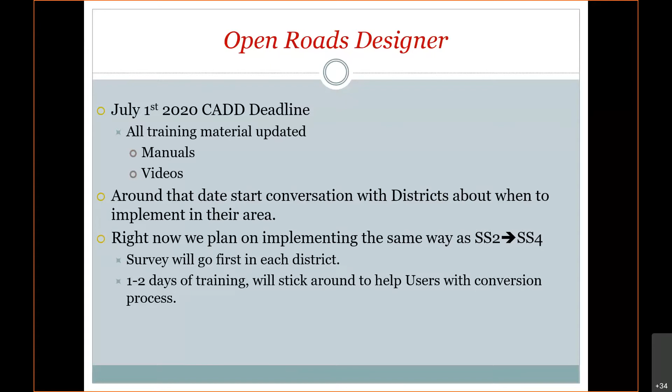So what's different about Open Roads Designer? Well, there's no more GeoPak, InRoads, or MX, the three civil engineering programs that Bentley had. They basically merged all those into one product called Open Roads Designer. It's 64-bit technology, so it takes on a lot more of the computer's memory.

And all the old native tools have been updated. Now, they may not be updated to the point where we'd like them to be updated, but there are no more native tools anymore in OpenRoads Designer. And so things like the plan sheet tool, that was still the old SS2 plan sheet tool, that's been updated. The alignment stationing is brand new. It doesn't use a GPK anymore. So GPKs are non-existent. And a lot of the COGO tools that we're missing, like translation, rotation, scaling tool, that's all in there now in the new ORD.

Something that's kind of similar, our survey and design features are the same. Before in SS4, they were called a feature definition, a survey feature definition, a design feature definition, and they were basically two different animals because they had different attributes to them. Well, in OpenRoads Designer, a feature definition is a feature definition, whether it's survey or design, it's the same type of feature definition. So that'll be a plus.

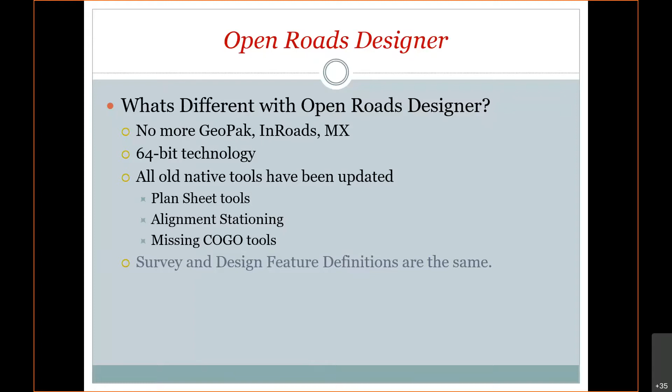There's a new interface. It's more like an Office product where you've got ribbons across the top. And the managed workspace will now be in ProjectWise and not on the T drive. So T drives could theoretically go away after we push out to the districts because we don't need the T drive anymore for the workspace. It'll be in ProjectWise. And that's basically what that said there as well.

So 32 versus 64-bit. So I went out and did a Google search on that, and a 32-bit processor can handle just over 4 gigs in memory, okay? But a 64-bit can handle just over 17 billion gigabytes of memory. So quite a bit more memory can be utilized in the new program. Most of our laptops or our workstations are 64-bit, but the SS4 program can't utilize it because it was written in 32-bit code.

So this memory, when you're working with big files, terrain models, LiDAR files, it should run a lot smoother and handle the bigger files. So here's a picture of what OpenRoads Designer looks like. You can kind of see the ribbons across the top. The nice thing about this is most of the tools are identical to what's in SS4. You just got to figure out where the tool is at, and we've tried to organize it so that you can find those tools fairly easily. And again, we'll explain all that when we come out and train you guys when we decide to go to ORD.

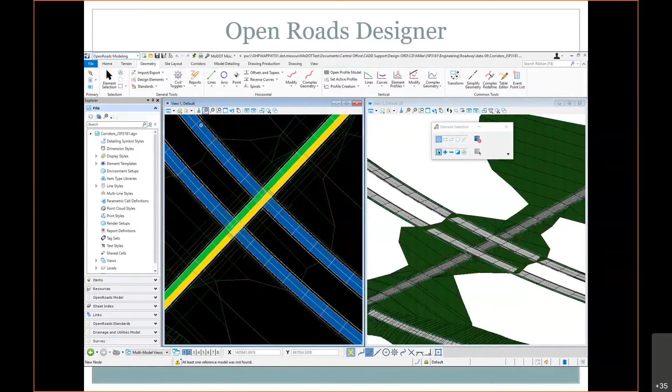Also, ProjectWise is going to be restructured a little bit. We believe that everything should be under the job number, whether it's bridge or design or survey or whatnot. And in the past, people have always kind of freaked out, they wanted their stuff in their own little area so nobody else can mess with it. But with ProjectWise permissions control, we can take care of that and just put everybody under one job number. We think that's the right way to do it.

And that's all I've got on the update, guys. So I'm done unless people have questions about that. Thank you, Kevin.

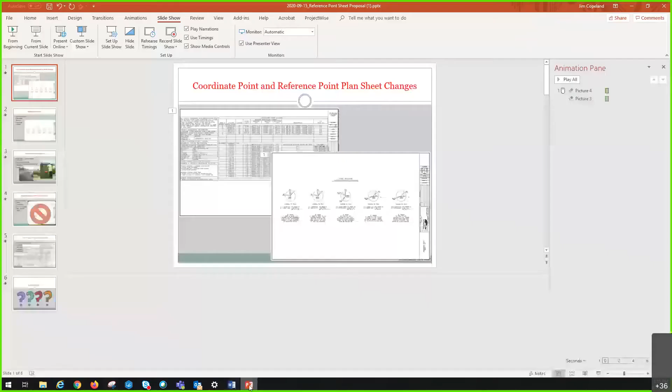And I will stop sharing, Bill. Okay. Let me get Jim on as a presenter. All right, have you got me presenting? I can hear you. Yeah, I think you're presenting now. Okay, so let me get this started. Can you see my PowerPoint there, Bill? No, you need to do the share option. Oh, okay. Share pull down. Let me minimize this. All right. It'd be share and then content, you got it, Jim. There we go. It's coming. It's on its way. See it?

Yes. All right. So a couple of things that I'm going to talk about today. I know some of you have seen the recent changes with the coordinate points sheet, but there's also another change we'd like to propose, and that's to do away with the reference point plan sheet. Just to get started, here's a couple images of our current point list, as well as a reference point sheet that has been completed.

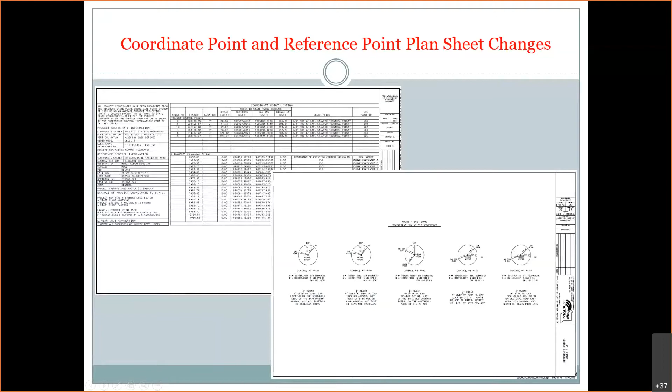Most everybody's probably seen that. So just a little bit of history about the reference point sheet. This sheet was really created back in the earlier days when we didn't have total stations, we didn't have GNSS technology. The surveyors would go out, they would traverse along the corridor. Once they had the alignment pretty much in, they would place control points at all the key breaks and line segments like POTs, PCs, PIs, PTs, and so forth. And that's usually what was referenced here.

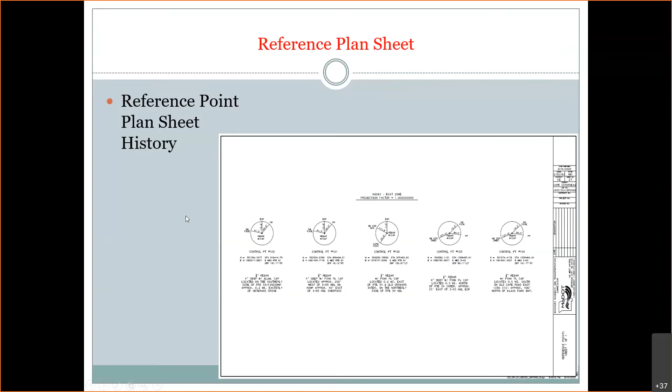Because back then everything was referenced to the center line, all the topography, any boundary lines. Surveyors would go and set up on those control points, pull a chain or whatever and use a theodolite, turn angles, measure distances, that kind of thing. Then, let me get to that spot. Sorry, I missed a slide.

So here's an example of what I was just talking about. They would just come in and they'd place marks along the center line. They'd do all their survey. The other thing is it forced them to be out in the center of the highway. Whenever they were doing existing roadways, they had to be in the center of the road.

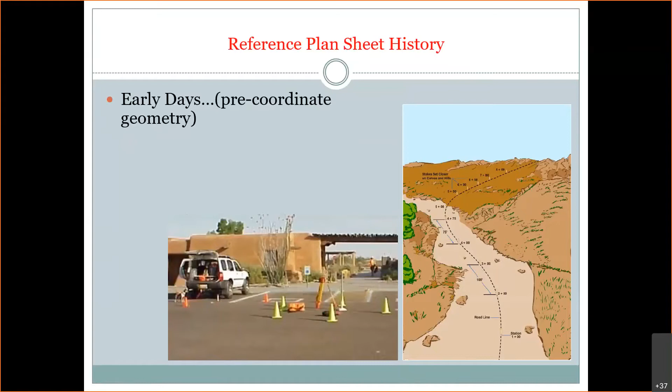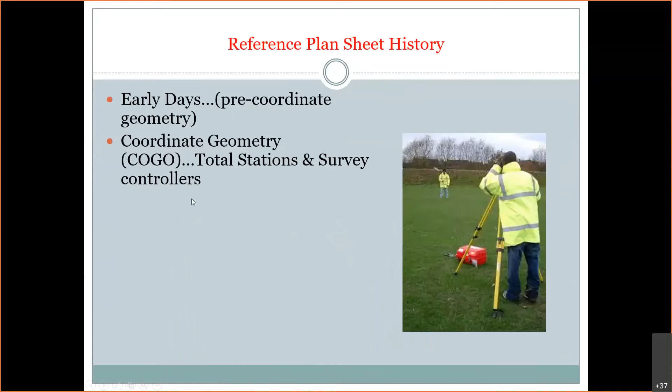And then along comes the use of coordinate geometry when we had total stations and survey controllers with surveying software. That was a new step, a new phase. That's kind of when the department transitioned from the old surveying method to the new surveying method, kind of what we're using now. We set control outside the roadway, more in a safe environment, convenient. You'd have surveyors standing behind a total station, measuring to a prism pole held by another person. They no longer had to use chains or tapes or anything. It was all measured with lights.

And even during that period of time, everything was still based on an independent coordinate system. Even though we had coordinate geometry, the project coordinate system was still whatever the surveyor wanted to establish. So a lot of times it'd be 50,000, 20,000. All the angles and distances began at that origin point. They were measuring everything outside the roadway, they could do topography, things like that, based on that starting point. No longer did they have to do any surveying from a center line, so that eliminated that part of it. So this was kind of the first step to where we are now.

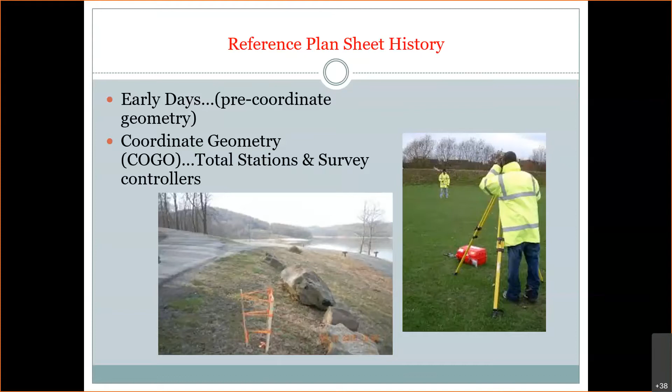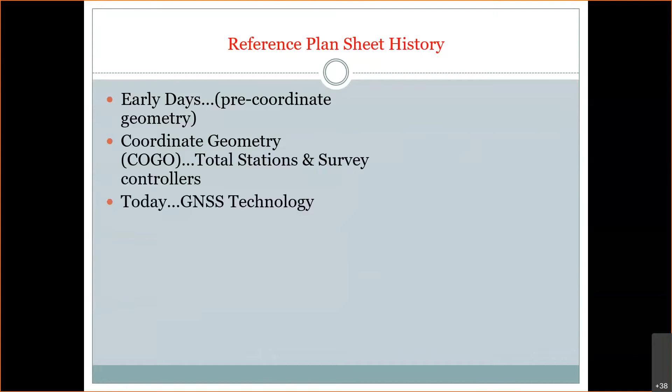So then today, it's a little different scenario. We still put the control off the roadway, in a convenient spot, but all of our projects are based in state plane. And since everything is based on state plane, it gives us the ability to just place control in the ground and go back and find those points without the need of the reference point sheet. So in other words, you have your reference points placed in the ground. An engineer or surveyor can easily take a GNSS receiver, walk out to the project, stake out that control, uncover it, and they're off and running.

So with the way we've evolved in technology, the reference point sheet is really almost obsolete, if you will. Most surveyors that I've seen or talked to, even our construction folks, they'll just put it in a survey controller and go out and stake it out. Once they get in the area, they'll take the metal detector, get exactly where it's at, and just dig it right up.

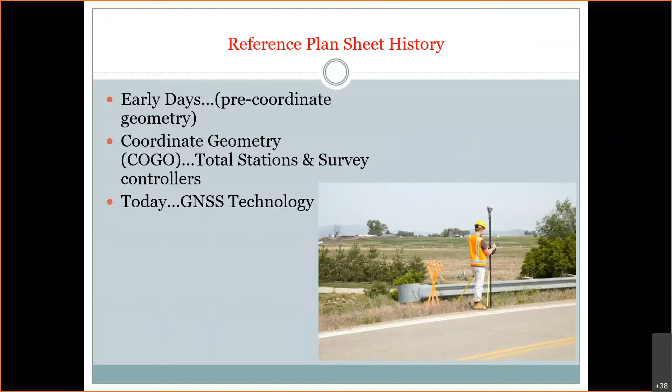So what we're proposing is to eliminate this reference point sheet totally out of the plans. It really has no value today because, like I said, surveyors and engineers are keying everything into a survey controller and locating it with the GNSS.

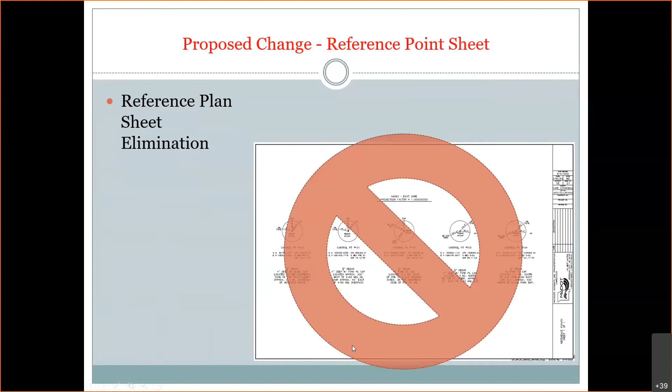The one thing we are proposing as well, and I think we've talked about this before, some people may be doing it by now, is including the digital image of the field book with the electronic deliverables. Typically, the surveyors are already doing this for the designers. They make a copy of the field book, they send it down, design transcribes it over into that reference point plan sheet, and away it goes.

This is just one step we can add to the electronic deliverables. For those instances, which are probably very few, that a surveyor or engineer needs to recover one of these points and they don't have GNSS, they still have this ability to do it with this type of digital image. So I think this is the way we should be going, because the production of the plan sheet is really a process we go through, but it's rarely used anymore. Most folks would rather just key it in, stake it out with a GNSS, and away they go.

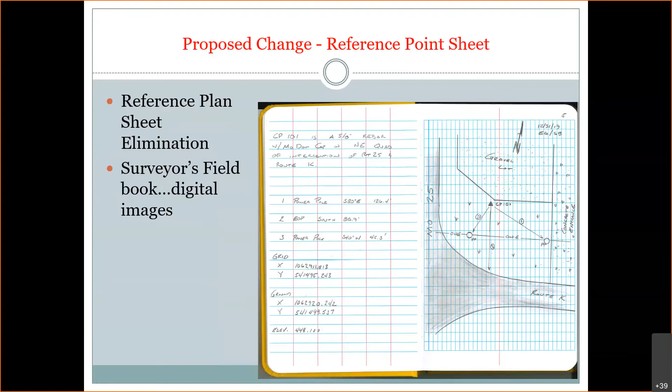Next we're going to talk about the recent changes, so the coordinate point list, and I'm sure I'll get a lot of questions about this. Recently we updated the coordinate point list. The reason for this was we had several times folks confused whether to use state plane or modified, and they would try to go from one system to another. It was a little bit confusing having them both on a plan sheet. So what we proposed was to only list the modified state plane coordinates.

When we proposed that, we had to take care of a couple of other things that our plans review folks wanted, which was how are we going to reference all this back to state plane and ensure folks understand that our projects are still being referenced to state plane. So we derived this table here on the left-hand side, which shows the metadata.

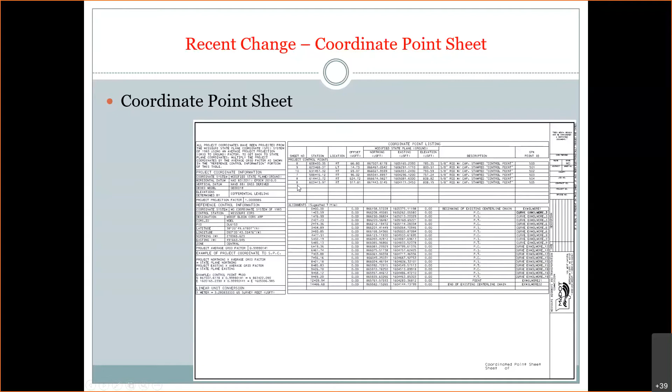With the update, we included the control points. So not only do we have the alignment points, but we also now have the control points, which were normally referenced on the reference point sheet. We've moved them over to the coordinate sheet and consolidated it. Then the next thing is we added this metadata table.

This table here is for those folks that want to be able to go from our modified state plane value, which is what our projects are designed and constructed in, back to state plane if needed. This information in the table allows a surveyor, engineer, whoever to go back to state plane.

So we can run through this a little bit. Obviously everybody knows what the modified coordinate system is. NAD 83 is their horizontal datum, NAD 83 Epoch 2010. That's our current datum that MoDOT's network is running in. Most surveyors have migrated over to this. Our vertical datum, which is pretty much standard or should be standard, is North American Vertical Datum 88.

We usually put GNSS derived, and that's because most surveyors will go out with their GPS and establish a point on the project for all their vertical benchmarks and everything to be referenced from. So they set an initial point on the project, and that's what everything is based on, usually from a GPS observation utilizing the next thing on there, which is a geoid model.

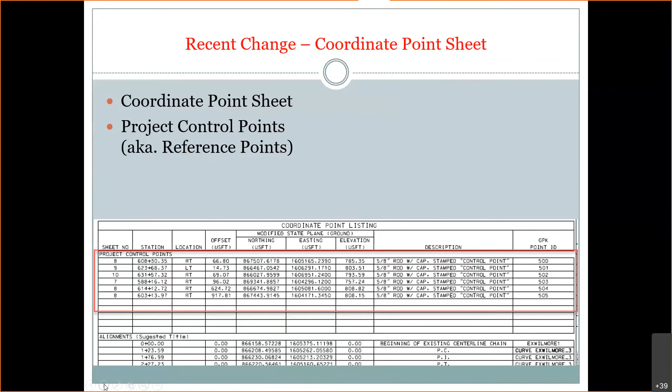In this area here, your surveyor should be giving you all this data. If you're not getting it, you just need to ask them, but they should be able to provide that - your projection factor, and then we move into the reference control information. This was the portion that we had to do for our plans review folks.

This was to provide a control station that was in state plane so that a person could reproject the modified back up to state plane. It also helps surveyors in the future, 10 years from now, if they come back on this project and maybe they've got control still left out there, they can recover it and upgrade that control to whatever the current horizontal and vertical datum is being used at that time.

And then the next thing is the average grid factor. The average grid factor is basically what the average grid is for the project. It's also what is used to derive the projection factor.

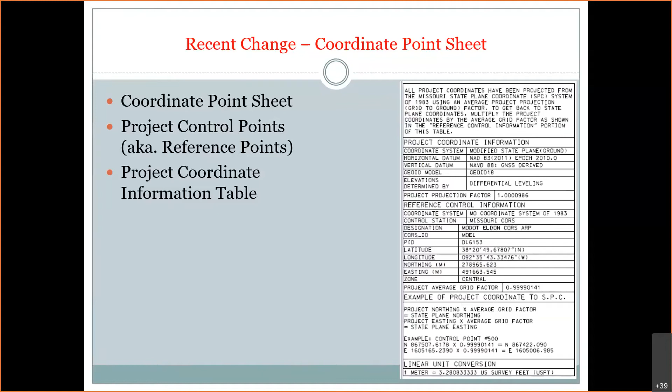And that's really it for me.

Questions? Thanks, Jim, that's pretty good. A little shorter than I was expecting from you, but that's good.

Okay, let me go back to presenting. Share my content. Can you see my screen? Am I presenting? Yep, yes. Good deal. Oh yes, that was Jim. Here's his phone number, email, and you've seen Kevin's. And now it's my turn.

So I'm going to do a technology preview of the End Area Volumes in Open Roads Designer. I had a video planned out for it, but I'm just going to do it live. It'll take me about 20 minutes to go through this.

I opened up a brand new file, blank file. Before you do any of this stuff, you want to make sure you went into your corridors and make sure it's on the final design stage, which is now called feature definition. But it's the same thing as SS4's design stage. You want to go in there and make sure it's at the final so we interpolate a lot less. And then you'll create a brand new file.

Now, I've done videos and showed a preview on how to do cross sections. Cross sections are a little different. I talked about live nesting on that one, how we can utilize it as a container file and bring in one and everything comes in. In this case, when you're doing your earthwork or calculations, you want to make sure you don't use live nesting, and you just want to bring in the certain corridor you want to do your cross sections on. So right now I've already set up my coordinate system.

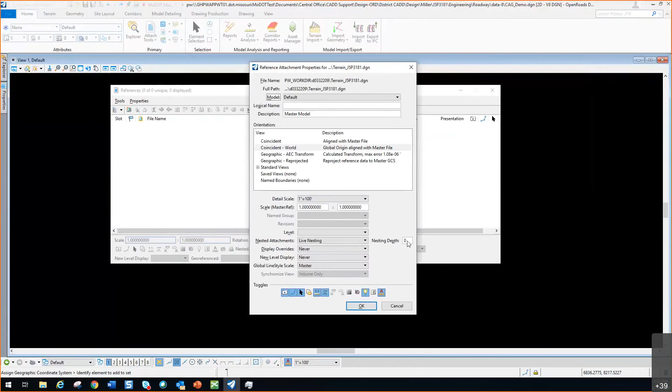Here's the one we want to make sure is nesting depth of 0. The reason is because right now when we do our earthwork calculations, it can only calculate whatever's in the DGN file. So if you just want to do one corridor, you'll have to separate them, and nesting depth of 1 will not separate them - that'll bring in the ramp 4 corridor that goes along with this project. So it's important to do like we did in SS4, we'll do a 0 on all three of these.

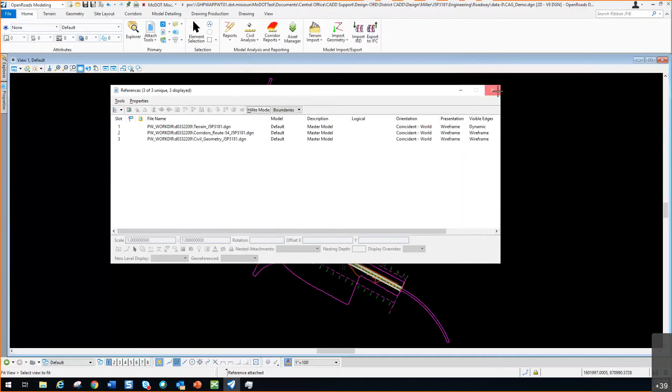And then I'll hit a fit view and make sure I got my project. I do. Close it out. Next step is to make our terrain active.

And once the heads-up display pops up, we're good to go. My element selection tool is all the way on the other screen. Okay, so now I have my terrain active so I can see everything will be in my 3D file.

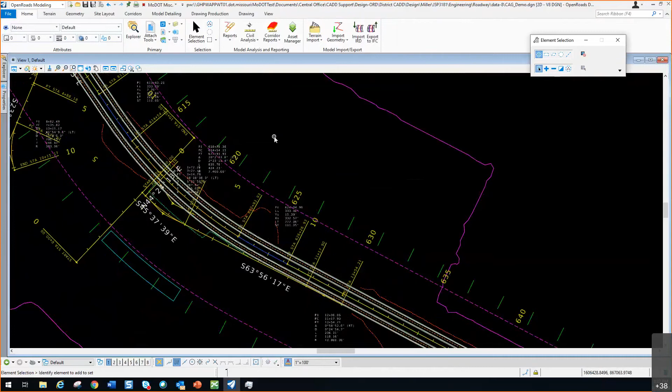So this is important with the new program, when we do these cross sections, we have to have both views open, the 2D and the 3D, to get it to work. So I'm gonna hit the F6 key, and the area I'm gonna work in is gonna be right here. I'm just gonna do a couple of sections through here. I don't want to do the whole project, it'd take a long time to process.

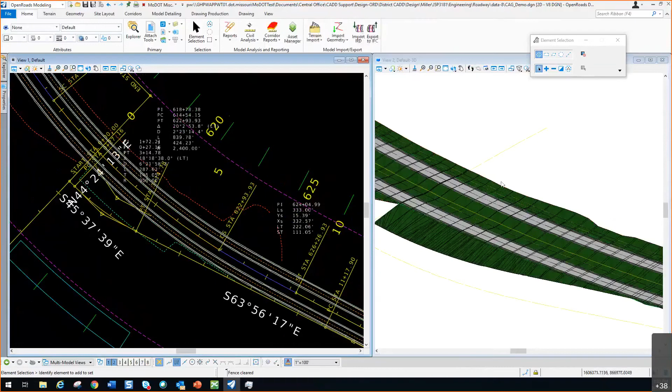So once you've got both windows open, then what you want to do is go to your... and I don't know if I'm going to be able to see it. I got a box in my way. And there we go, I got it out of the way.

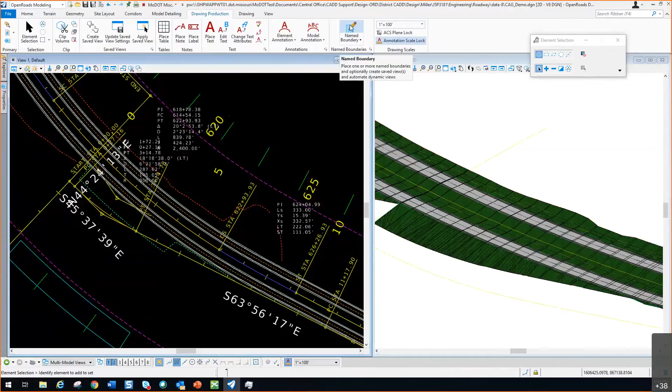Okay, I need to go to the Drawing Production tab. Still in the Open Roads Modeling workflow, but we go to this Drawing Production. And in here, we've got some named boundary area down here at the end. And we'll select the name boundary to get it to start.

This is just like placing the cross-section tool, so you'll need the civil cross-sections, we'll need to pick which is the 4th icon. We need to pick a drawing seed, and for this one, 10 scale works out pretty good. It incorporates most of the project, or all of that area, covers it all.

The next step is you want to follow your prompts down at the bottom left, and it says identify a path. So I'm going to pick that 54, route 54. That's on my cursor. It gives me a name, and this is going to be the name of your name boundary group, so I'll stick with that.

And I'm going to do a station range of 617 to 622. So when I go to populate this, there's one thing about selecting my range, and what I'm going to do for my stationing is I got to take into consideration that I do have an equation back here that's going to be off by 1.01.

So I will have to give it a region 2 because before the equation is region 1, after the equation is region 2. So I'm going to come out here, swipe through, give it a 617 plus 00, and then my R2. And then I lock that in by just hitting the left mouse button.

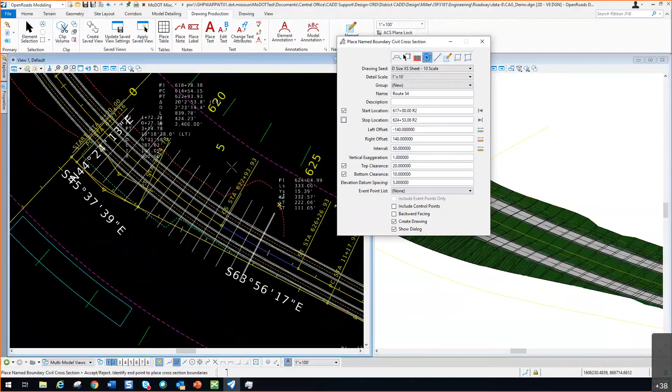Then I come out and accept that value, and you can see it's starting to create these shapes in our 2D window of our cross sections. I want to go to 622, and I'll do a region 2 as well. Hit the enter key, and then you can see where they're at.

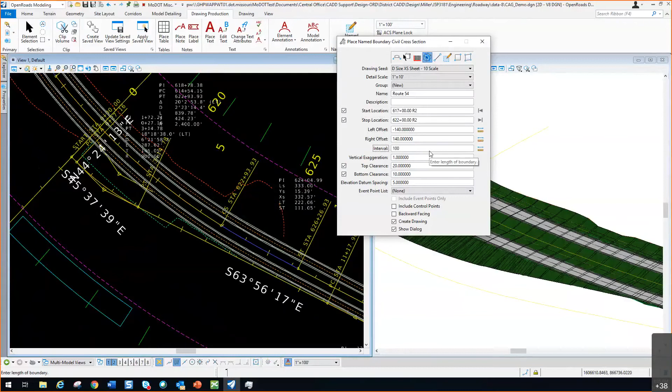And for this demo, I'm just going to do 100 on the interval and lock that in. That way I've only got a few sections to deal with. It'll process a lot quicker.

Okay, you can change your left and right offsets however you want. I think we're good to go, and where these shapes are going to go, everything's inside it. So I'm going to leave it where it's at, but you can change these.

And again, like I talked about in the cross section one, you want to make sure that you follow the seed that you're using. A 10 scale sheet gives us 280 feet to deal with, so whatever can fit in that sheet is what you want to use. Fit it within that 280 foot.

Next part of it is we're going to create a drawing, and we do want to show the dialog. So all I need to do is go out in a blank area and start accepting to place the cross section boundary, and then place the tool or get the next tool to come up.

When this tool comes up, this dialog, the main thing about it is that we want to add annotation to it. These cross sections, like I showed before a couple months back, are automatic. You can automatically have your cross sections annotated, and you'll see we have a few annotation groups out here for whatever you want to see.

We have the axis annotation with the grid, so you get the full major and minor grid, and you have one without the grid at all. We also have an end area volume annotation, which I'm going to talk about in a few minutes. And then we have a new one, annotation with major grid, because I know a lot of people like to turn off that minor grid. This will give you an option just to run it with the major grid. But for this, I want everybody to see everything, so I'm gonna do without grid.

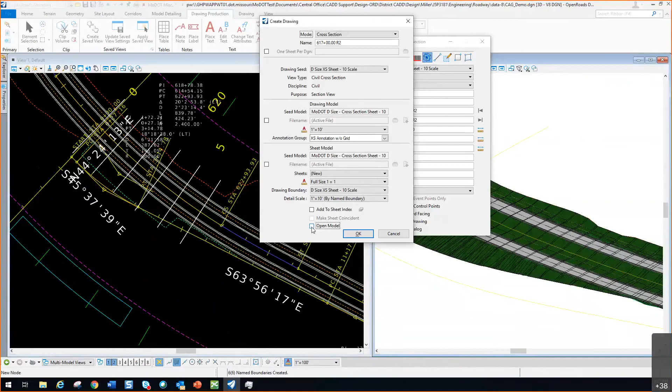This open model is important if you wanted to go in and check out the different models; it opens up to the last sheet model. I don't want to do that. I want to create some cross sections or go on with the earthwork part of it. So I'm going to uncheck that. I'm going to hit the OK button, and it's going to process all those sheets down here in the bottom.

And what's processing is creating a drawing model, and it's creating a sheet model. And the sheet model will hold 2 to 3 of the drawing models. So a drawing model represents each cross section individually. Sheet models will place 2 to 3 of them in there and give you the sheet. You'll notice that the shapes showed up in the 3D window like they did here. But I also noticed that they're solid white shapes.

Now there is a transparency to it. So if you just select your View 2 window and go to your View Attributes, you can turn on that transparency, and it looks a lot nicer. You can see through the windows and see your project behind it. I also have another video out there that talks about taking these shapes and moving them so you can move them around. Well, I'm not going to do that in this presentation. This is just all about laying out some earthwork.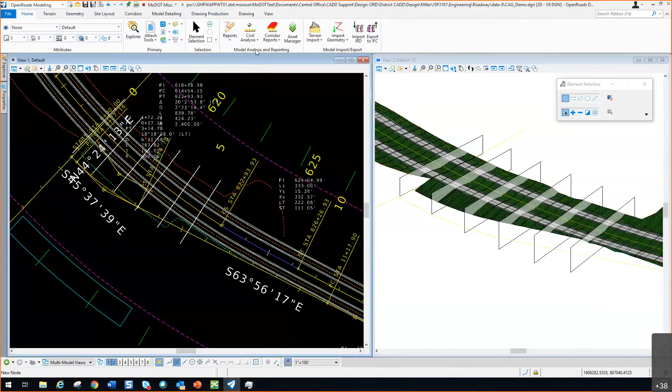Okay, so I go back to my View 1, and I want to create these meshes that represent our cut and fill for our project. And it's going to do the whole project. So to do that, I need to go all the way down here to the Home tab, which will bring us to the ribbons. And the ribbon I'm looking for down here is this Model Analysis and Reporting. And under Civil Analysis is where that tool is located.

So if I go to there and I go to my Create Cut Fill Volumes here and select it, it's going to bring up another dialog with some options. Now, the cut and fill feature definitions are already predefined, so you just have to left click through those. And later on, we'll get into the unsuitable, custom, and substrata. But I'm going to go ahead and accept these with the defaults. And then I'm going to data point to accept the selection, and there'll be a processing window or bar on the other side.

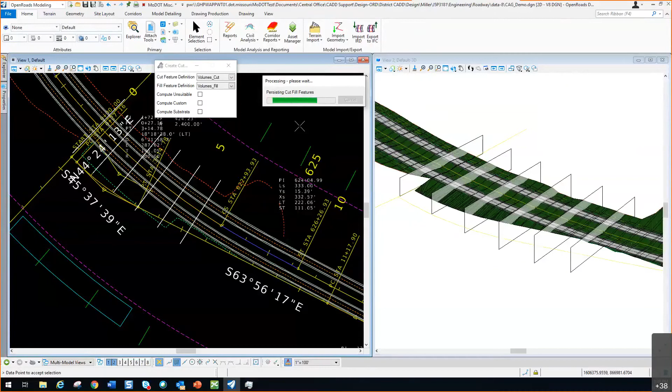And it'll process, and it does it for the whole job. And you can see there's a lot of cut in here, all this blue, and then very little fill. That's why I picked this section. I wanted to show both of them. So it creates this mesh shape, and if you select the mesh shape that's out here that represents the cut, and you hover over it, sometimes you can hover over it and get that little properties box.

If you can't, with it selected, you can go to properties on the left side here, this little tab, and you'll notice that you get your normal information, but you also get some civil quantities for the whole shape. Okay, your square footage and your cubic feet. Okay, but that's for the whole shape. Then you have the fill, which you could do the same thing. Well, this one's going to let me have the properties box. Get that properties. Again, you'll get your square footage and you'll get your cubic volume for those shapes.

But we want to do a specific set of cross sections, those areas. And this is how I navigate through the different models that have been created, because we cut cross sections, it creates models, and I could go to the Home tab and open up the Models tool and then double click and get through my models. I could do that, or through the pull down, however you want it. But I kind of like this view tools down here at the bottom left.

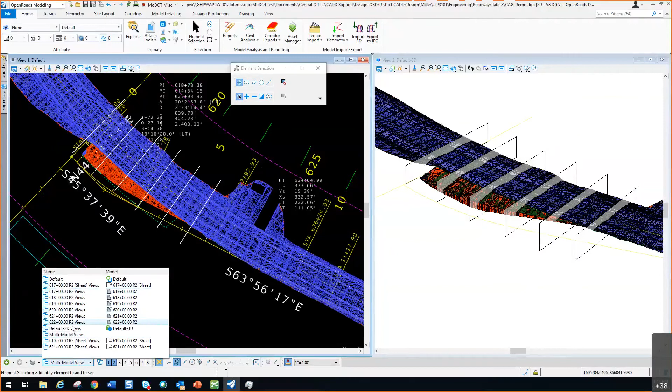And if I select the MultiModel View, which is what I'm in right now with the 2D and the 3D, it allows me to choose the different models that have been created. So you've got a couple 617s here. One says sheet behind it, which is a compilation of probably 617 and 618. And then you have all the individual ones. If it doesn't say sheet, that's a drawing model. And I'll go ahead and open up 618 and show you what that looks like.

So that's just got a gray background to it. It's got our project in here. You can also see it's already been labeled because we chose that label annotation group to label just our cross sections without the major and minor grid lines. You'll see you got your elevation offsets. You got some slopes out here.

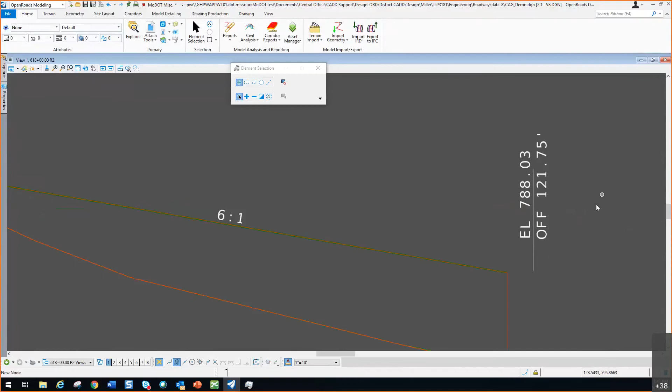And what is this? Oh yeah. What's this one? What's it talking about? Well, what's going on here is a bug, and they're working on it. It is actually still labeling what it sees in the background, which is a clip from our 54 to ramp 4. This is where ramp 4 would be. So it's labeling it. But it is a bug. They're going to fix it.

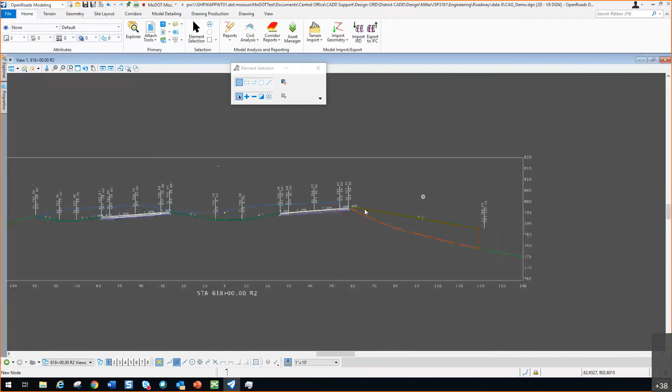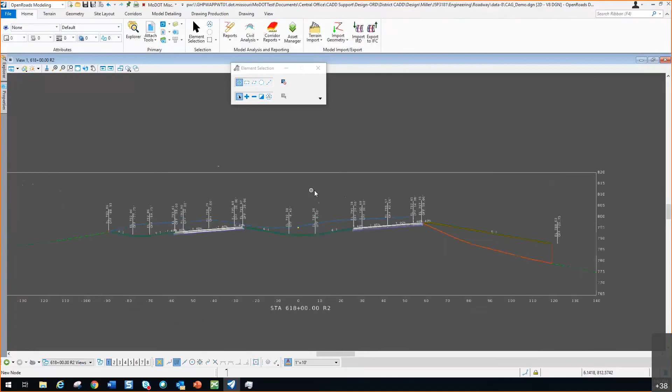You can also see that there's this blue shape that goes around the project. That's the cut. And then you have your red shape that goes around, which is the fill. But in this model, there's no earthwork that's been calculated at all. We have to do that through another couple steps. Okay, so to do that, I want to go back to my multi-model view, which again brings me back to that 2D and 3D view.

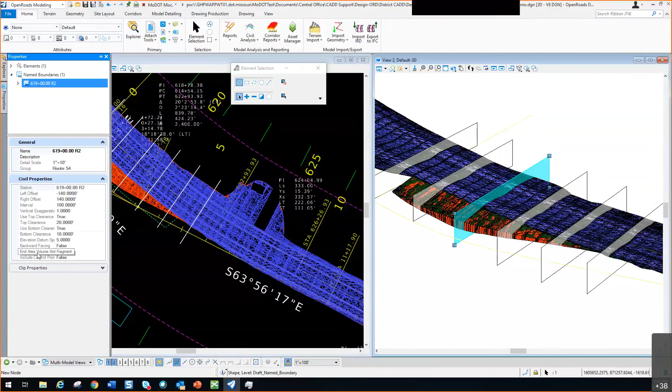And before I do that, I want to show you these shapes out here. I'll just pick one over in this 3D window. And if I go over to the properties on the left side and open it up, it's a named boundary. And if I select one of these stations, down here in the civil properties, there should be an end area volume XML fragment. It's missing, so when we ran our sheets, we didn't get any calculations. The next step that we do provides the information for this XML report. So it's empty. We'll go back to our 2D.

To go ahead and calculate your earthwork, you simply go back to that civil analysis tool, the pull down, and you go down to this other one called End Area Volume Report. Now, when you open this one up, you get that small dialog. It defaults to the named boundary group that you have there. You can hit the up-down arrows if you had other ones to calculate. I only put one in here, or if you do none, this XML report is going to calculate for the whole project. I want to just do 54. So once it's at that, I go ahead and left-click to accept it.

It gives me an option here to remove cross-sections. So if I had a bridge or something out here that I didn't want to show, I can remove it just by hovering over it. You see how it turns cyan. I left click on it, it removes that cross section, so it won't calculate between these cross sections. Okay, but I want to calculate everything. I want to see it all, so I'm going to reset to complete, which is the last part of that. So I'll right click. It's going to process the named boundaries, gives us our end area volume report.

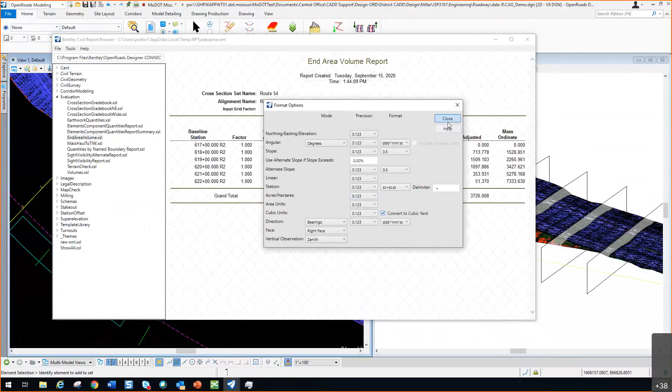And what we've learned about this report is the first thing you might want to do is check your tools. I've already done it, but it comes defaulted a little differently. So I always like to go to Tools, Format Options, and make sure I have English stationing because it comes up as metric. And I want Convert to cubic yards on for any earthwork I'm doing. And then usually you want to change your direction and your angular to degrees, minutes, and seconds. Now, unlike SS4, where when you changed something it would automatically do it in the background, this does not. It only changes when you hit the close button, but it does change.

Okay, and we also have the other XML reports that are out there, so you can look at it by station and look at what you've got in cut and fill. You can do all that, see your mass ordinate, but we're going to just leave it at end area volume for this example so I can show you how they match up. And I'll move this out of the way. Okay, so we ran the report.

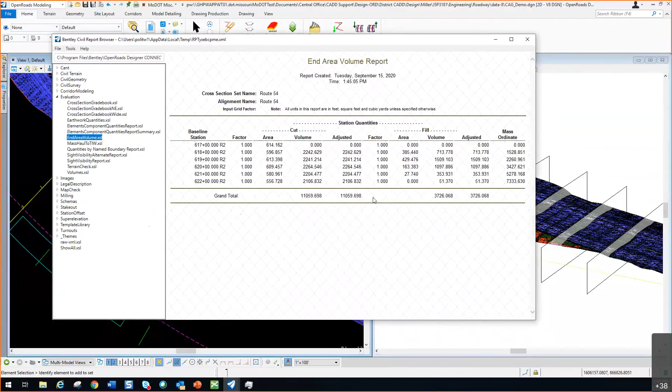Now if I look at this shape out here, and I probably picked a different one, but it doesn't matter, and I go back over to my properties, open up my named boundaries and click it, you can see the end area volume fragment has been filled out. I can't make heads or tails of that, but somebody else might be able to. But it's filled out, and that's the important part of it. So select a blank area. Now I'm going to go to 618 and look at what it looks like.

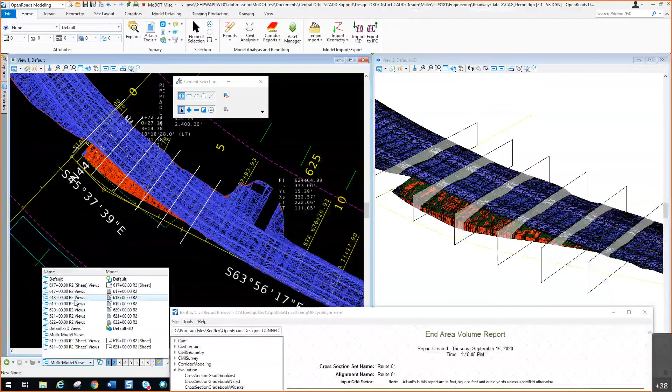Nothing's changed yet. Got to go through one more step. Okay. Going back to our drawing production tab, we got to annotate the earthwork. The shape's ready for it, but we still have to go out and place it. So under drawing production, we have this option for model annotation. Okay. And we want to do annotate model.

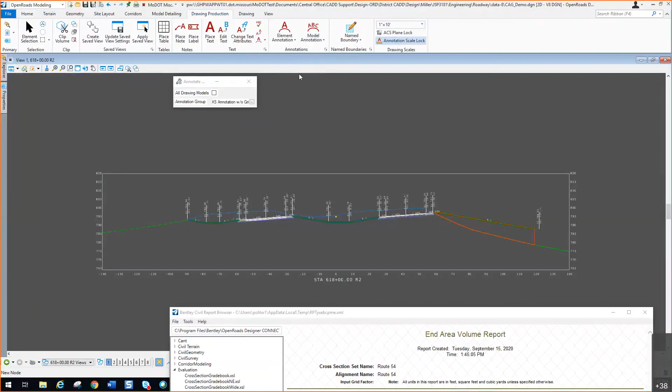Now we already have some annotation out there, so we're okay with what we've got there. We just want to add to it. Do we want to do all the drawing models? You can either select this button or you can hit the up down arrow. It doesn't matter. And as far as changing the annotation group, you have to hit this little square with the three dots on there to get that to change.

So I'll select that, and of course it comes up on the other screen every time. And you'll see there's a cross-section folder that we need to drill down through. And in here, what we're looking for is our XS EAV annotation. And that's all it's going to annotate is what we've done in that end area volume report. So I'm going to do it for all models because we didn't do it before.

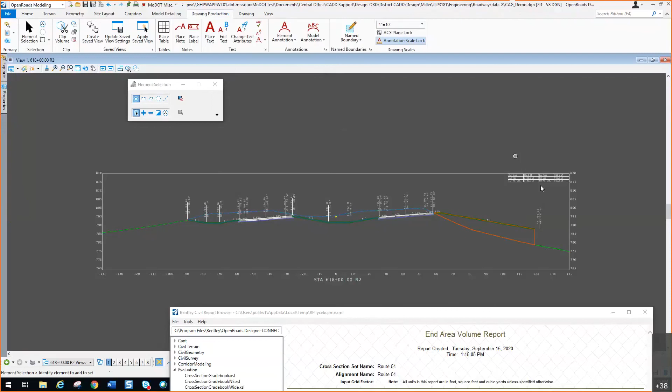And when I left click, it's going to accept my all models, and then left click again to accept that annotation group. Of course, it's processing. And you'll see now we have a block up here in the upper right-hand corner that represents our annotation for our earthwork, gives us our cut and fill areas, and our adjusted volumes.

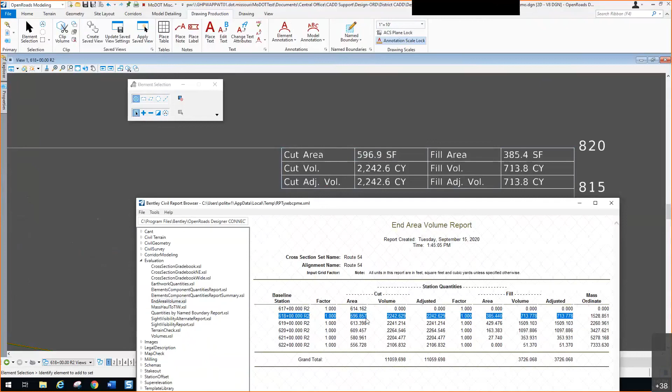So if I go back and I look at 618, I believe we did, you can see that the cut area is 596.9, and we're sitting here 596.9. It had rounded up, and our fill area, we got the same values in there, so it's matching up and it looks good. Now the other thing about this is, I'll go ahead and move this out of the way,

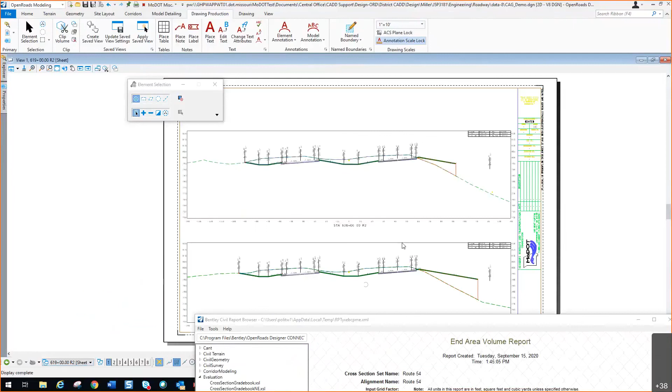is when we go to our sheet models, and I'll go to 619, and again it's going to populate as many as it can fit in there at the project. You can also see that that has come out as well and filled out all our end area volume information.

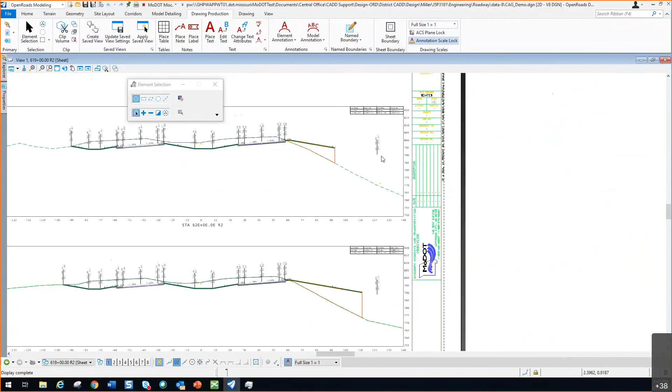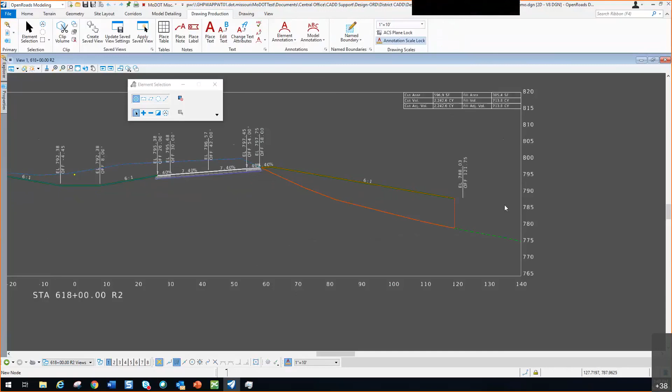Okay, now there's some other tweaks I want to work on with this for right now. As soon as they finish this up, get that fixed, that's an annoyance for one. If I had ramp 4 in here, back to 618, if ramp 4 was actually in here, you would actually see the elevation offsets to it as well would all be annotated, every point, but all those annotation points go back to the center line or the baseline of this alignment. It's something that is also a bug that we're working on.

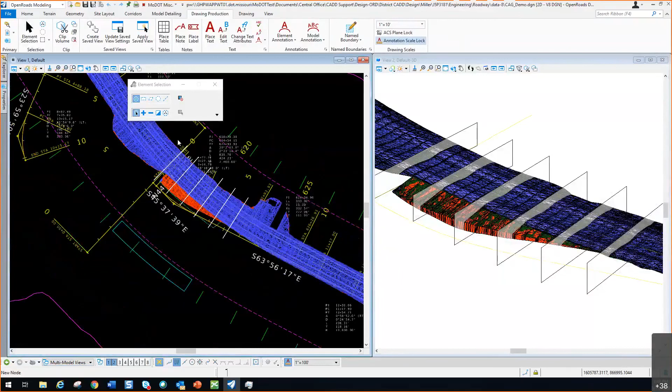But that's pretty much all I had for this technology preview. Hopefully we can bring you something next time as well. I'm running out of ideas, so if you get any ideas, you can share them, and that'd be great.